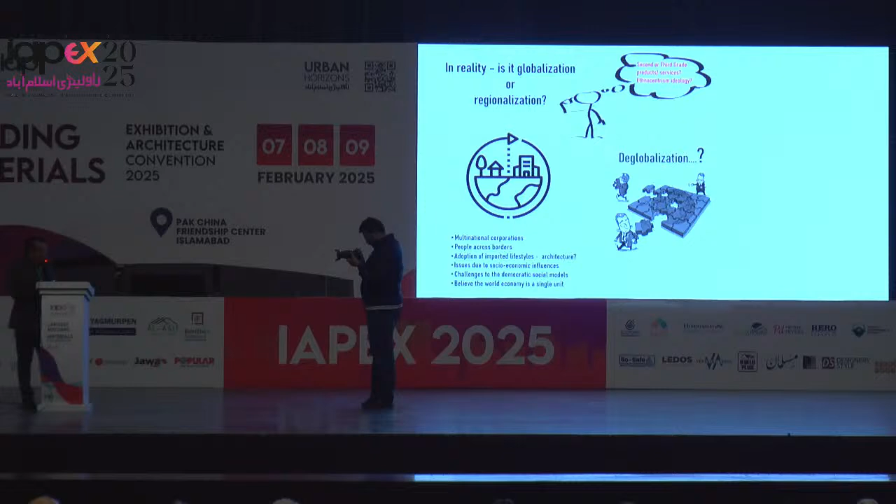With urbanization, we know that globalization also happened in parallel. With that, we have borderless communities, high adoption of lifestyles including architecture, and also certain problems being created. But my biggest worry is whether we are going for globalization or a kind of regionalization. Because in the third-order cities or countries, perhaps we are not getting the same service, same commodities, same goods as the first-order countries. So now we are talking about deglobalization as well, because with the current power struggles and so on, we are having a lot of uncertainties.

So this localization is something we should think about. Of course, this was spoken about by previous speakers as well yesterday, to a certain extent. How do we deal with that, through our services as architects, urban designers, planners? Are we thinking of tailoring what we got influenced by through globalization into our contextualization? Do we foster our identities, our culture, our transformation? Is it guided?

So these are some examples. For example, now an abstract situation has been created, right? This abstract situation has resulted in these kinds of conflicted spaces, as you might call it. I can take some examples from Colombo - perhaps you're all aware of this - but so much of the culture areas have been transformed into nowhere, nobody-known, senseless places. One example is the Slave Island community area with modern architecture, but there's nothing to say, no relationship to the people.

So I thought these are the key things. There may be some more you can add, but at least if we can think of these elements, which we can put into our practice.

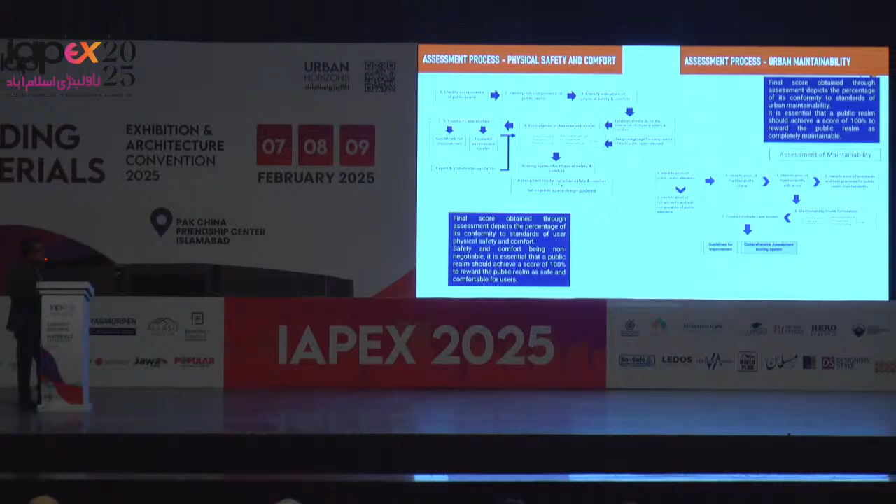I think the psychological part is not really embedded into this, because we thought this would be quite special doing it by ourselves. So different kinds of formulas and methodologies were worked out. Our task was to come up with a statistical model which can be quantified, especially for some of these psychological things, which are difficult. But I think we did it quite well.

So these are the models of how we did it. This is the methodology that we worked out through the entire process.

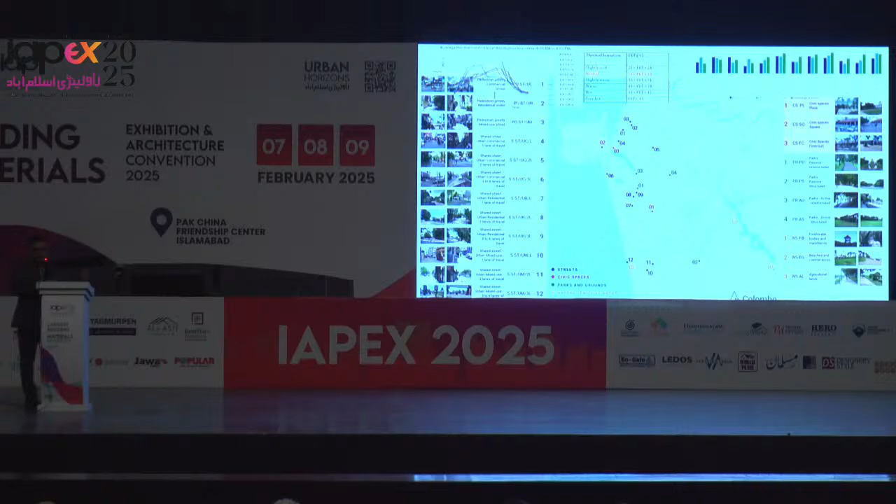I'll go to the next section. So these are the application locations in Colombo. We selected 22 case study locations, applied the model we created, and got the results. These were verified through public testing and so on. Finally we published 3 documents where someone can test the safety and comfort aspects of a public location.

So these are the design solutions I'm going to present. Due to the time, I might go very fast. The first 3 are basically related to urban design, and the other 3 are mostly suburban design, not really central to the city. So out of these, starting here, the Borella Township Redevelopment Program.

We were assigned by the Urban Development Authority to work on this project. This project is a proposal only so far, because these are somewhat challenging in our context to deal with.

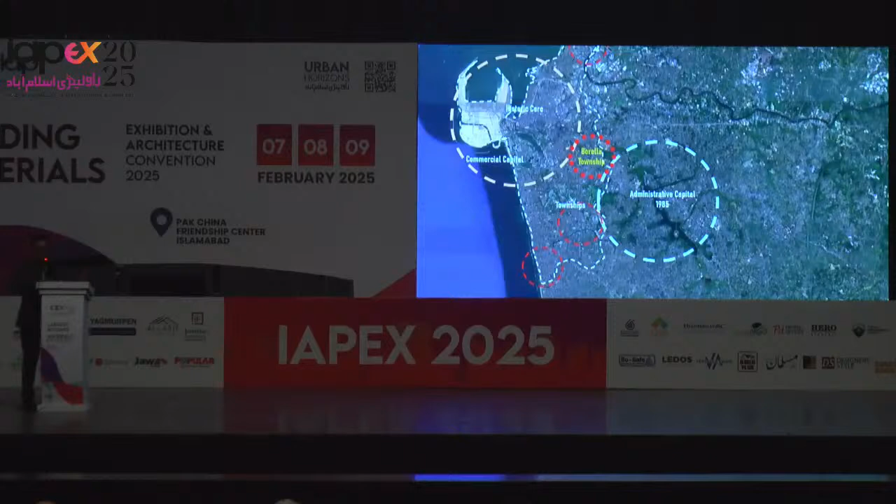As you see here, Colombo is in two distinct parts. One is a commercial capital, the other is an administrative capital that was set up in 1985. Borella township is located in between, so the problems and opportunities are extremely different to other suburban locations, though it's all within the city. Also, a light railway transit intersection is proposed for this location.

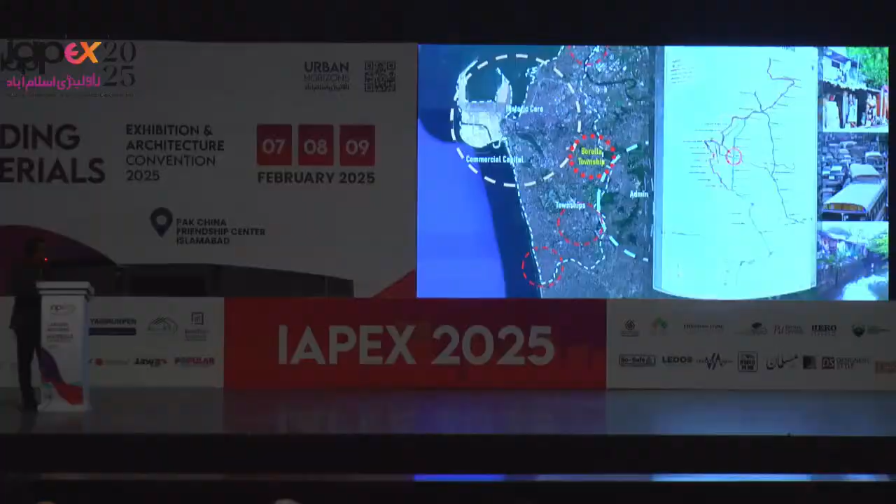So the area was completely lacking in culture, as some of you have experienced. There's no center activity and a lot of traffic issues. There were poor settlements where people were living, occupying a lot of land, and much of such problems were looked at.

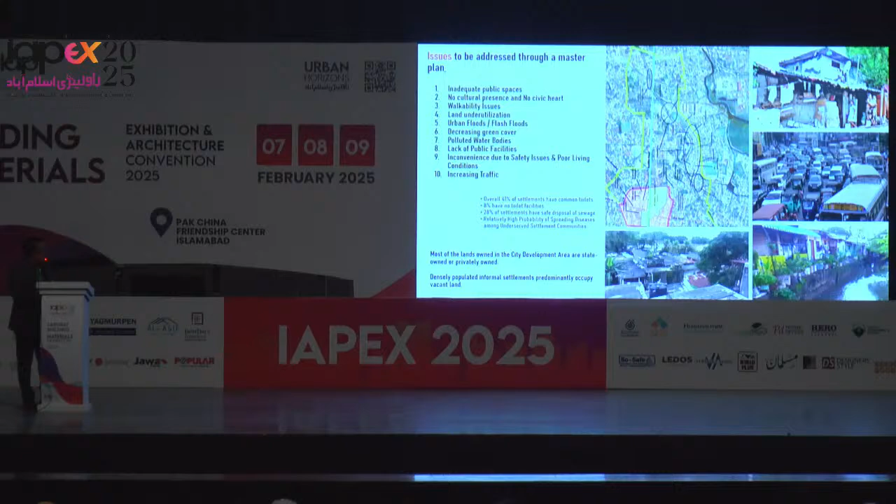So we were thinking to come up with urban design principles, basically a vibrant and diverse kind of upscale integrating community and township. We wanted to introduce new green into the place, and the entire place is to be built with culture as a civic place, right now it's not so. So a mix of land uses, pedestrian connectivity, and local businesses are also here to be played as a main actor.

So simply, if I show you our proposal, these purple and green lines are the proposed LRT railway lines, and Borella is right at the center. In the plan we considered about 3 nodes, mostly supported by other transport as well. This pink or purple colored thing is the cultural spine which we created between these centers, so these lands are to be released. Mostly these lands are from the government, so it's a reorganization and reworking of government lands which are heavily underutilized.

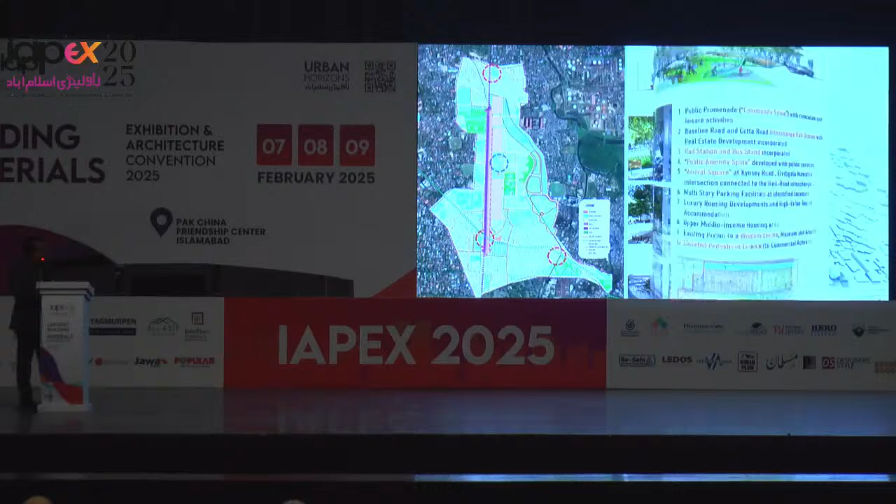So this is basically the visual aspect. We have videos as well, but I don't think we can play them. So that's about this project.

So the next project is about transportation architecture. I'm very happy that, being an architect, I got to work on such a national project, as the architect of the toll gate designs and ancillary facility buildings in Sri Lanka, which is the first highway or expressway built here. We had to work with other professionals, engineers, transport engineers, etc.

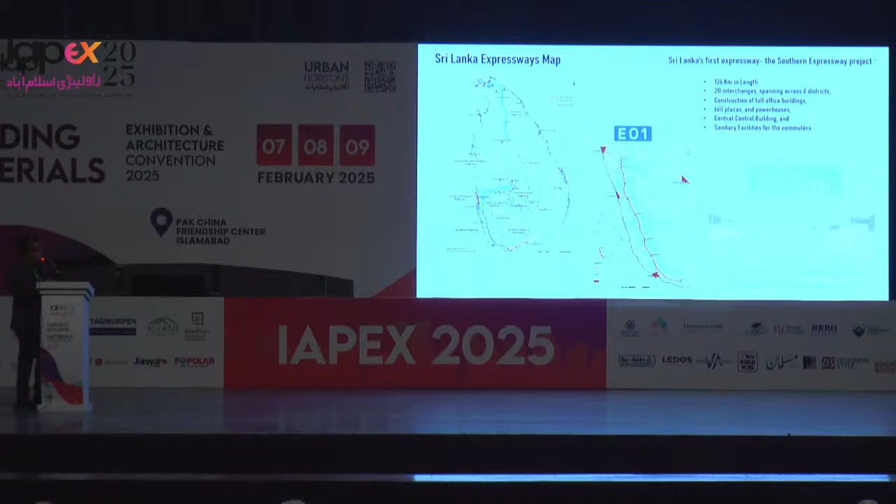When we got this project, I was also looking at how other countries have done toll gates, because this was very new to us, we had never experienced toll booths or toll gates or highways at that time. Then I thought, no, we should come up with a localized solution.

So these are the gates or kind of structures that you can see in Sri Lanka. Perhaps some of you have seen them. Some are temple related, some are social related, entry gates and so on.

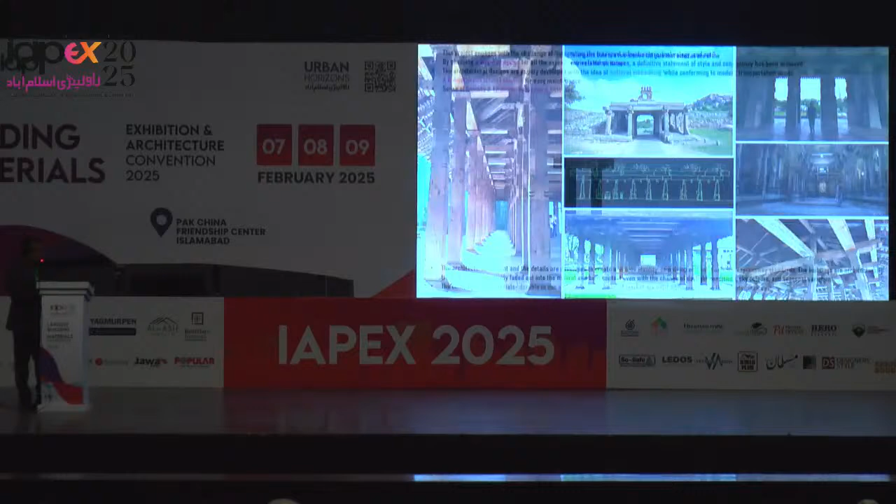So finally we thought that we will get something of a singular, simple design that is from the original local conditions, and that can be added into any numbers without losing the character, the aesthetics and balance. So this is the one that finally we got, but this is one of the things.

What is interesting again is that it has a lot of cultural embedding. So these structures are scale-wise different, but they are more aware of the people. And then it's a gateway.

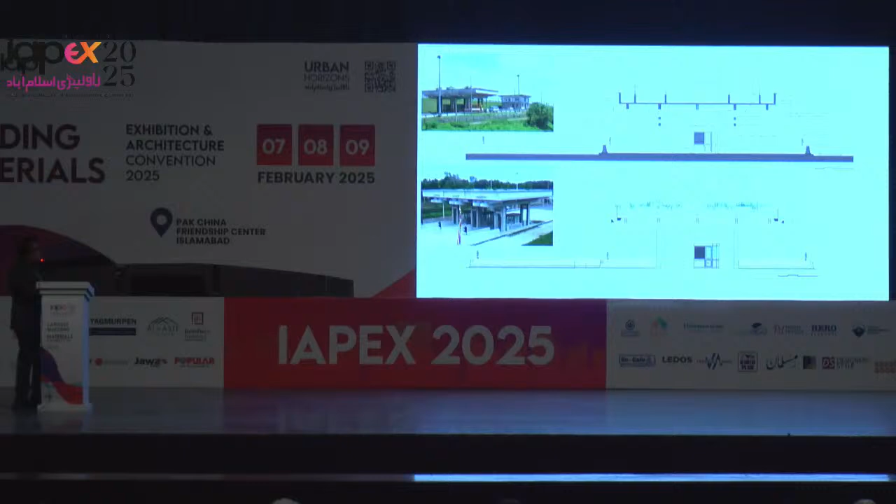So these are the sections, and some of this stuff. You see the locations are quite different. We had to work out differently for each interchange. This is the one in Kottawa. It's all with fair-face concrete.

Again, one of the biggest projects that we did with fair-face concrete in a little bit of an intricate way, with columns and beams intersecting each other at different levels, as you see here. And there's no maintenance needed. That's one of the major features here, that just washing is required, and it merges with the weather and the kind of environment.

So this was also shortlisted for the Geoffrey Bawa Award, as well as we won another award from SLIA.

Right, so the next project is about, again, urban design. This was advertised by the newspapers by the University of Sri Jayawardenepura, looking for urban designers to work with them. And I'm happy that we could do this thing. Sorry, it's going very fast here.

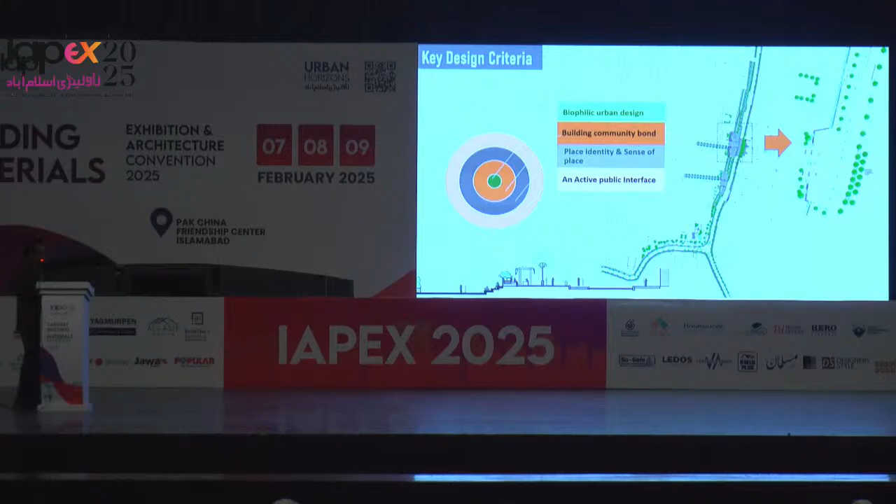Right, so this was the situation before, but I think there's a little issue with this thing. Anyway, so let it go. So this is how the concept is realized.

So what we want to do is to create an interface between the community and also the students of the university, where they can meet each other. So this area has been created by shifting the university's boundary into the university side, leaving more space to the roadside. I think that was one of the greatest decisions that the university took at that time with our recommendations, making a place about 1 kilometer long at the front of the university.

Students can have their meetings, their dances, their protesting activities, and whatever. You see that people are selling and coming here. So it's a very multicultural and multi-activity place.

So this is, again, the practice-based research that we had, I had another student to work on this. And we were looking at other universities to see how biophilic design has affected things as a culture-based design strategy. And then we got good results.

So the next project here is a visitor center in Jaffna. Jaffna is located in north of Sri Lanka, which has a different culture. You can see the existing buildings and so on.

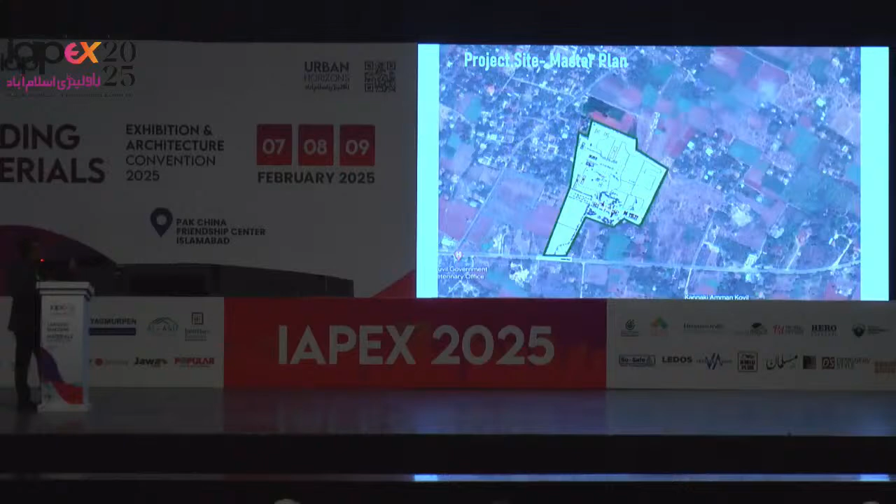So this is the land before we interfered. And this is barren land, there's nothing much. It's a very dry looking area with no trees, not farmed. So this is a proposal that we brought, with one multi-activity building and a series of other buildings.

What's special here is that we created this building project with the participation of the local people as well, because in Jaffna you don't get contractors like in Colombo and so on. So we had to look at their work, and I used to stay there, working with them to a certain extent.

You can see even certain design decisions that we took. So the entryway is located in the pink color, and you don't see the building until you come close to it. So it has been purposely done in that way. This is something that we thought would culturally bring certain elements into there, and also the production process here. I think that's also interesting, and I enjoyed it quite a lot there.

These are the different typologies. This is a multi-purpose hall. Right now you can see that a lot of activities are happening, even weddings, and tourists are coming, classes, meetings, discussions, evenings full of people here, as you see.

So I would say that this is also a socially very motivated project, where Jaffna, after the conflicting time, didn't have much space, because what is going on there is completely different. As I said, under globalization, culture is not really preserved.

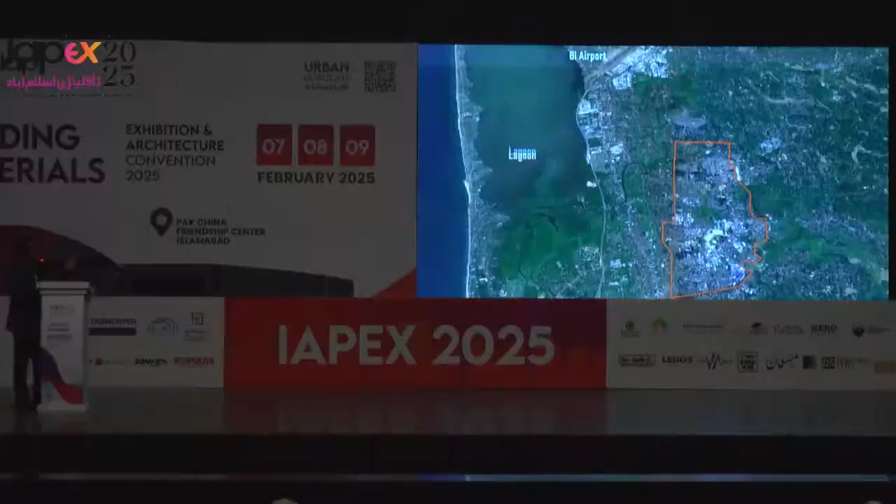I had about 3 weeks to do the designs. This is located in the industrial area established in 1962, near the airport. You can see Bandaranaike Airport there. Our surroundings were quite interesting, the lagoon and Muthurajawela.

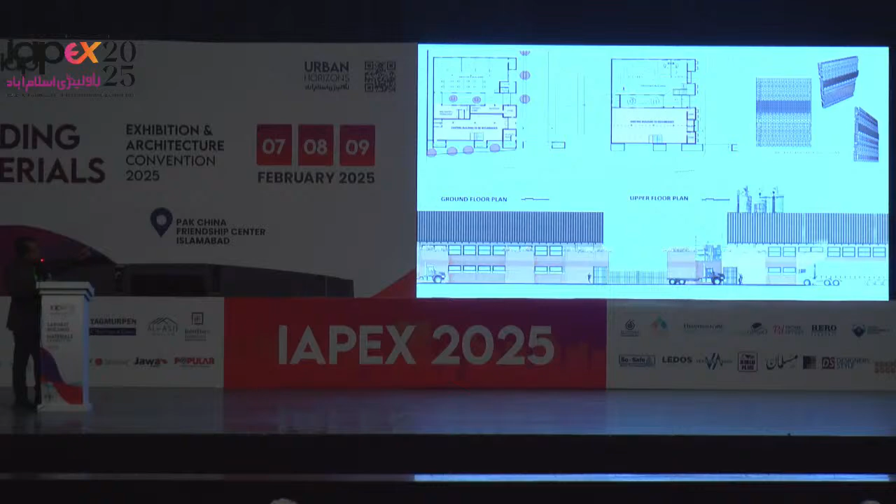This is the situation before we started, and the site is there, a very small site. What we did simply is repeat the existing building, keeping a courtyard in the middle, and brought in some local type materials. So this is the result, before and after.

There are no walls or anything, just open to the street, but in Sri Lanka it's sometimes very difficult to achieve these kinds of things. Everybody would like to have their own gates and walls. But I think we've done something, with the time as well as the cost, very minimum cost.

The last project is something different. Normally as architects we present finished products, what is completed, but I thought it's also interesting to share what is going on now. So this is still an ongoing project.

This is the nature retreat. The site is extremely beautiful, located near Ratnapura, another town where you get flooding always. This site also has flooding issues, but it's in a very hilly area, with the middle part being a ridge.

The site slopes down towards the edges, and then you get the paddy fields. The entryway is somewhat suburban or rural looking. The surroundings, you can see in the pictures, these are the views from the side. This is the central part of Sri Lanka.

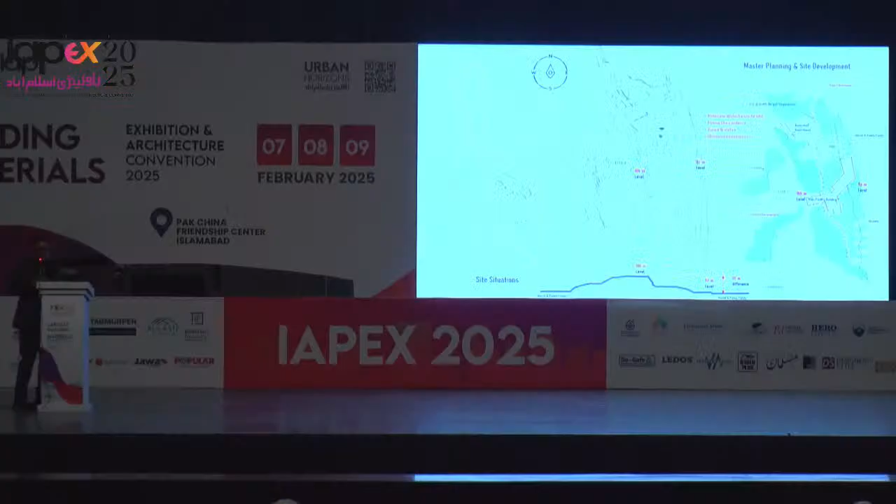In the master planning site development, the main building is located in the middle, and then you have other components, with chalets located towards the nature areas along the paddy fields at different levels. From the main building, you can experience the entire place from different view angles.

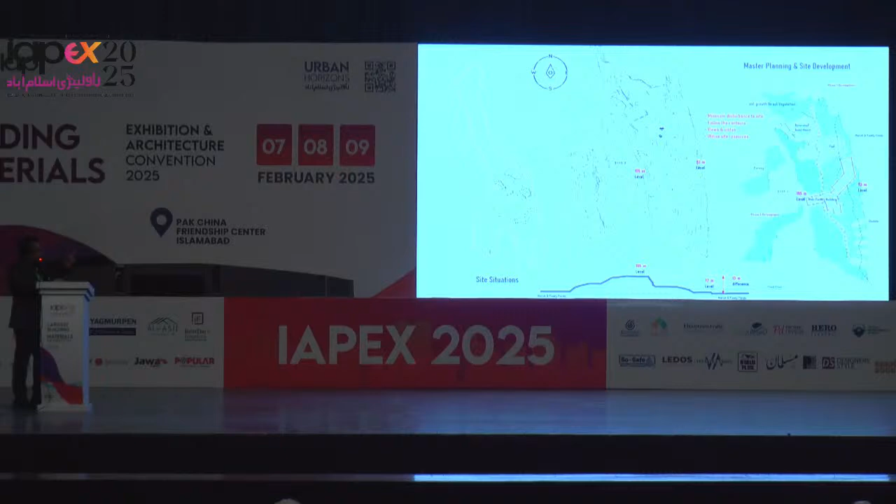The reason for this orientation is we wanted to minimize disturbance to the trees. I think we've taken out only about 5 trees maximum, because the entire site is full of trees. So minimum disturbance to the site, following the contours, views and vistas, utilizing the site resources — these are the key things we adopted here.

Sections were worked out this way, three-dimensionally as well. I have a lot of drawings, but I don't think I need to share them all here. So here are some details of the entrance area.

You can see that the road is at the middle, the higher ground. So you enter there, and then you have a series of levels going downwards, because we have a 13-meter difference. This is how we started constructing the pool and the building using concrete, because of the water table — it's an effective flood plain.

The site manager is a local man. This is the entire site with so much green. It's still going on, some of the works here, that's why you don't see the finished product yet.

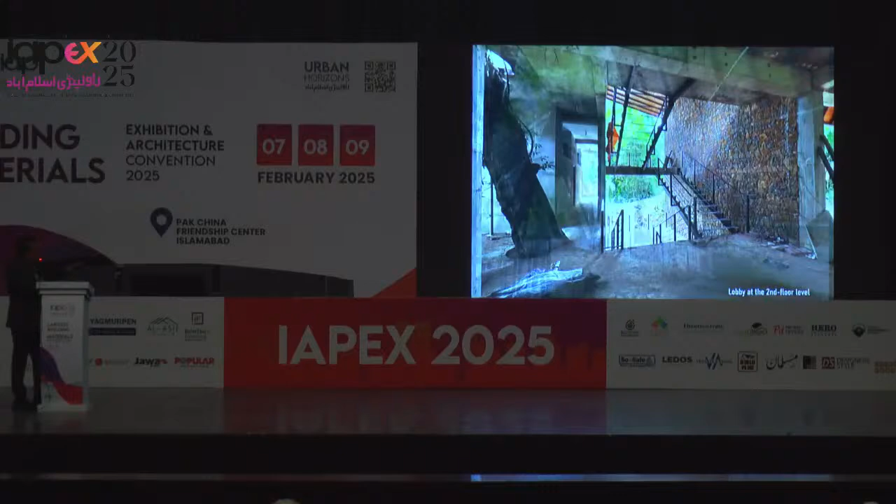The bottom is kept open. We use a lot of rocks and small elements from the site, even timber is available around this area. This is the main entrance area. We used to carve the spaces out from nature. So this, again, is the entrance area.

That's about all I can share with you in about 15-20 minutes. I think I was on time. Once again, thank you very much for listening. Thank you.

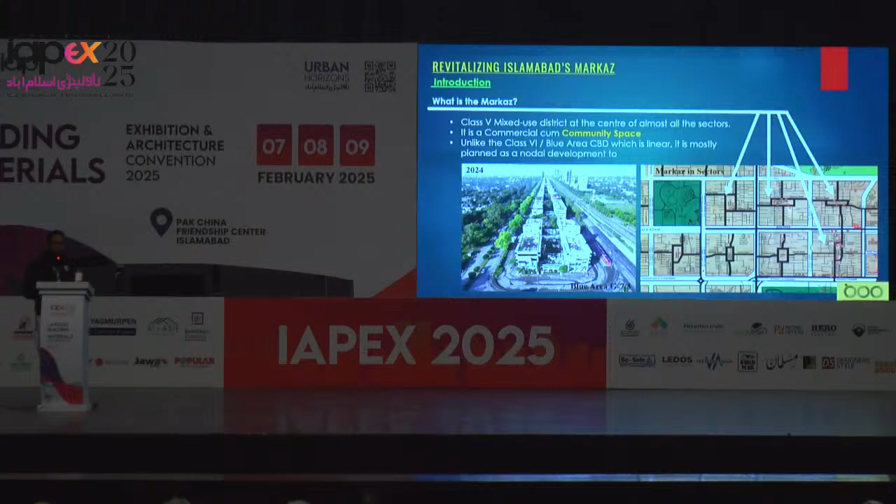So for those of you who are not from Islamabad, just to give you an introduction: the planning done by Doxiadis is divided into sectors, and each sector is considered a class 5 community, meaning a set number of people or inhabitants that will live in a particular sector. Each sector has 4 parts, with one central part considered as a Markaz. On the left-hand side is the class 6 category community space, also known as the Dynapolis, the linear expanding CBD.

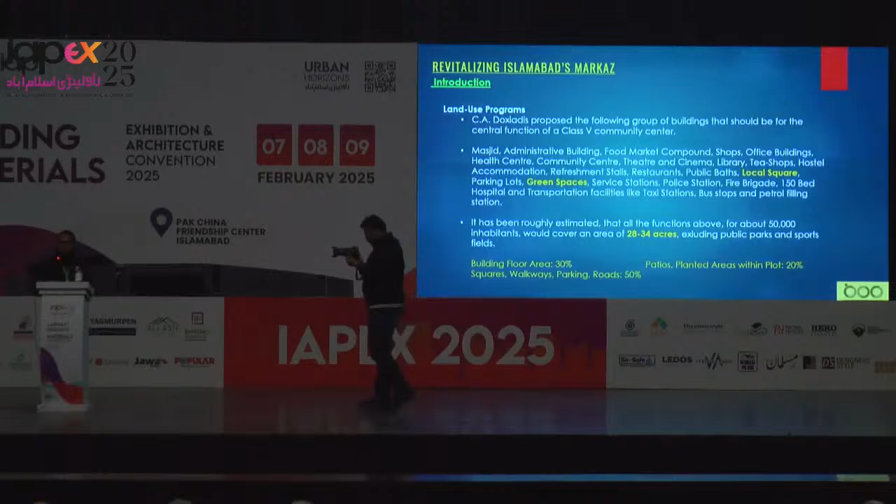So there were a set of programs introduced in the Markaz, which I'm going to talk about in particular. By definition, the Markaz is not only a commercial space, but it was designed for commercial and community activity. But the latter part is not so much promoted in our case, and the land use has been changed multiple times.

Considering these are some of the key programs provided in Doxiadis' documents, which you can also visit at the CDA's library—there are pages of like 8,000 plus documents available—the key word I've highlighted is the local and the green spaces. Out of the area proposed, a standard 28 to 34 acres of land is designated for this Markaz, which would consider about 30% as a built-up area, and the rest goes to open spaces around the building, places like walkways and parking road areas that are under CDA's direct involvement.

So talking about the first Markaz here, this is the G6 Markaz. As per the definition, most of us just consider that the Markaz is actually in the center, which is the case here too. But since this was the first Markaz in Islamabad, there's a slight difference in the layout design. You see there are two precincts in this.

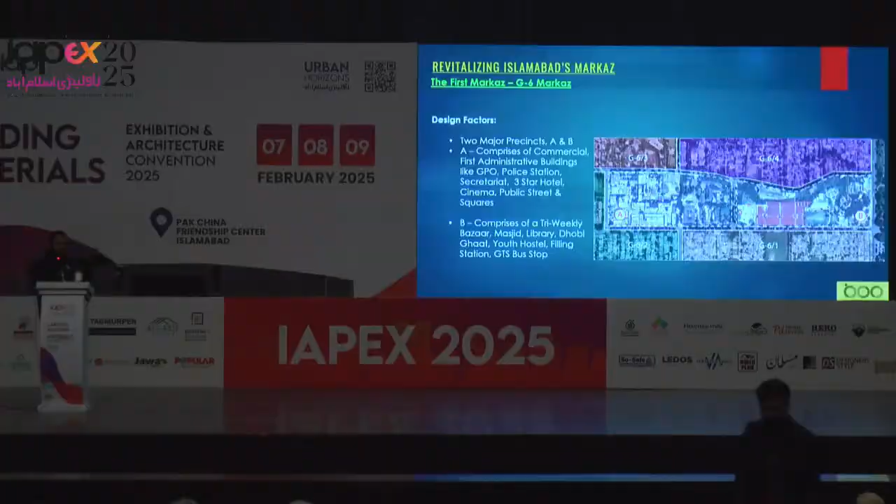The left part caters to all the commercial spaces, and since Islamabad was designed for a new set of inhabitants settling in, they required some extra amenities and services. So this precinct on the left side consists of a police station, a GPO, and the first administrative secretariat building. On the right side, we see a tri-weekly bazaar, which was the first basic need of the customers, a Jamia Masjid commonly known as the Lal Masjid, and then we have the Dhobi Ghat at that time—there was service of that. Youth hostels, male and female, are also over here. So as per the layout, whatever the city actually required in order to grow, all these facilities were very organizedly planned.

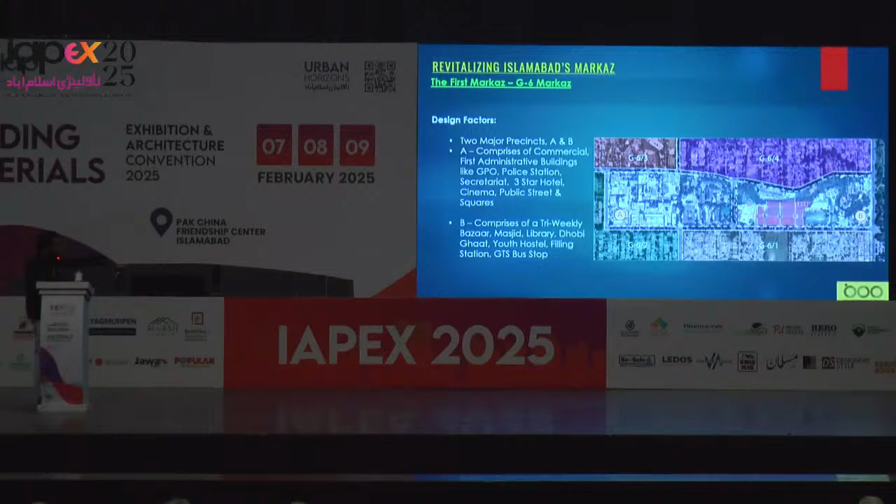Whatever was designed by Doxiadis was very thoughtfully thought out, and it was made very accessible and permeable to the people.

So considering, dissecting the first precinct over here, on the left side the pink line actually defines the pedestrian core. And in the guidelines, if you read Doxiadis, he actually says that in order to retain those people, you need to protect your pedestrian cores from the vehicular movement and the traffic noise.

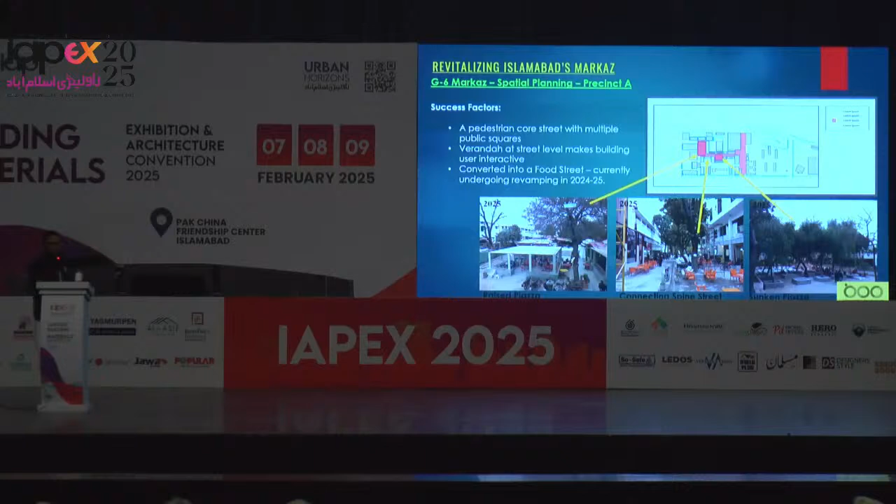So this is the current renovation that is going on. After 65 years, the city still requires an urban renewal method, and it is undergoing this renovation right now. So what we are seeing over here is the difference in the public square and how he actually considered the importance of public squares in order to create a micro environment.

So now going to the second example, the G-7 Markaz.

Doxiadis in his planning always respected the natural landscape of Islamabad. So you can see there's a stream that is flowing and dividing the Markaz into two parts. It could have been spatially displaced on one side, but it is still kept very centric so that it has easy accessibility from every side.

But over time, since it was not administered properly, this led to a few problems which we are going to talk about. So now, on a smaller scale, but on a standard size of 30 acres, the Markaz has all the amenities that were designated.

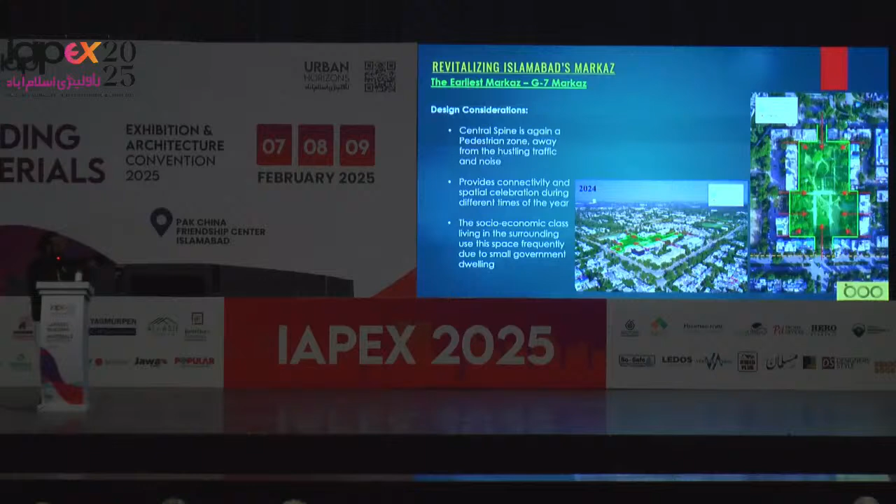So now taking an aerial shot of this, we are considering how the public space that was originally designed looked like, and over the period of 65 years, how this place has been formally and informally transformed.

And again, we would see a continuity and all the good urban features that could incorporate a public space, how there is visibility from all the buildings into the public square, and accessibility from all the people living in the socio-economic class around here.

So through these urban maps, we actually see that since most of the land was not properly taken care of by the CDA, along the riverine flowing right from the middle, we see a growth of trees over the next 40 years onwards.

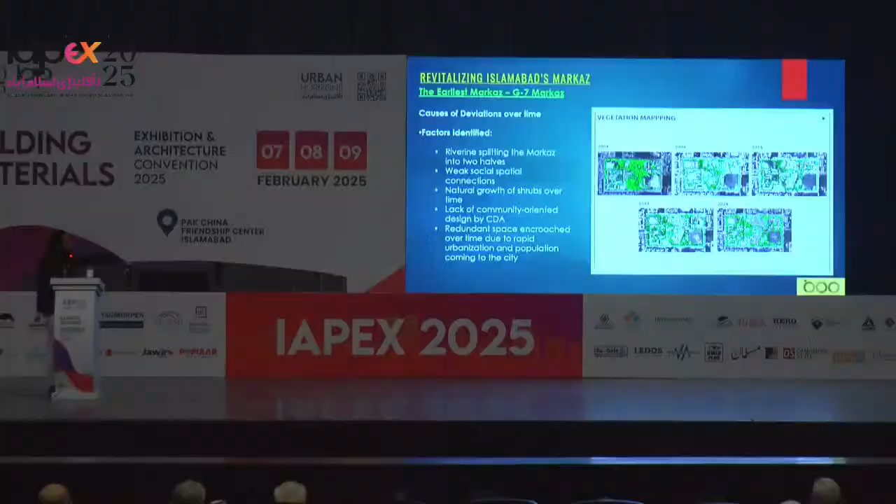But from 2004 onwards, we see that since there was a population influx coming into the city, and most of the people living over here in this sector are from grade 1 to 5 to 17 almost, there was a lot of movement and involvement of people coming for job opportunities over here. And we see that the redundant area is now being transformed into a slum area.

So underutilized space, again, the issue led to this.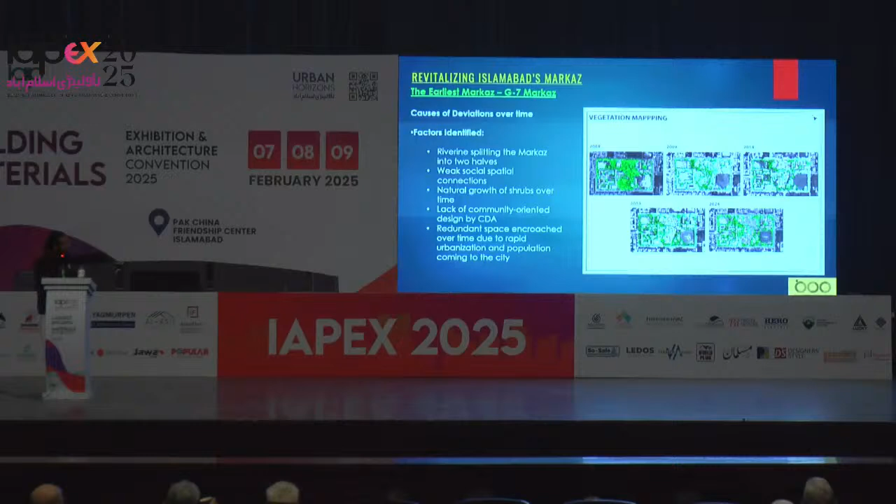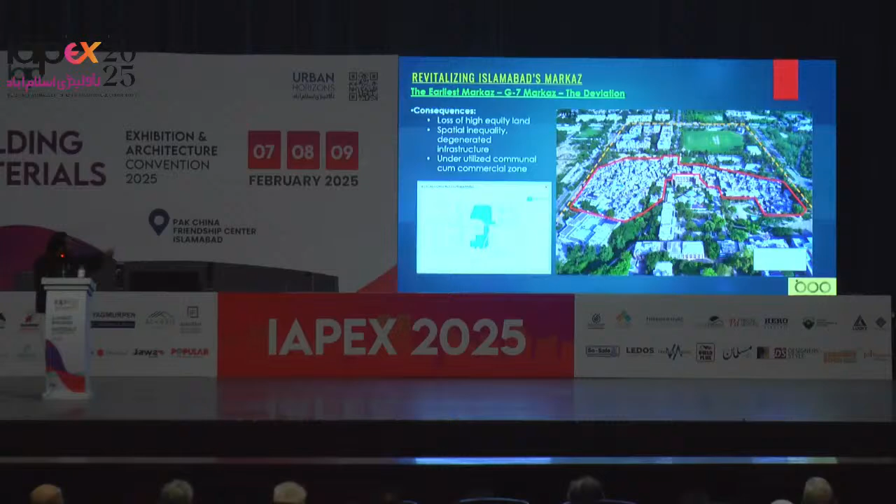The blue area actually highlights the zone that has been mapped over here. Okay, so taking case studies of two more of the Markazes around here.

So for those of you who didn't know, Doxiadis actually planned a railway station in I-8 Markaz, but in later regimes it was changed, reverted back to a Markaz. Now we see that this design has not been done by Doxiadis, but by some local urban planners, and the consideration for public space has been significantly reduced.

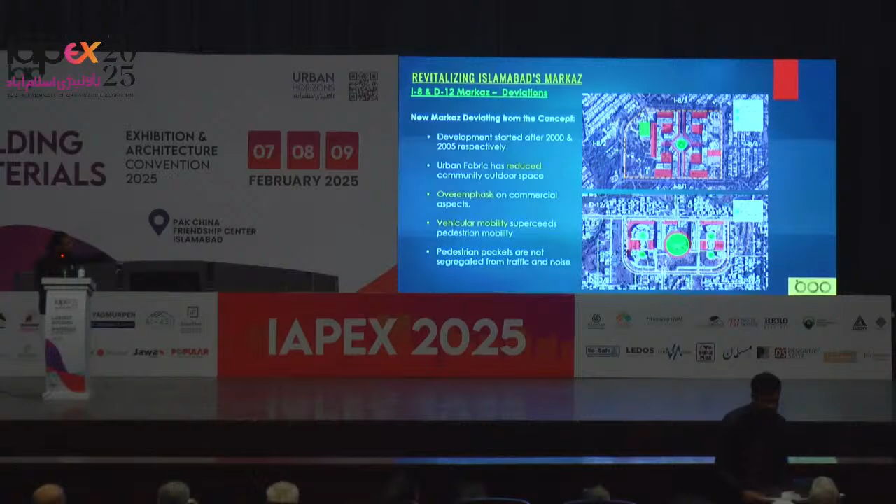Similarly, if we see the development of sector D12, the master plan has been locally done, and what kind of urban space has been strategically placed. So the volume has reduced, the vehicular mobility has increased many folds, and what is affecting is that the public space has been compromised many folds in this case.

So now I would take a case study. This was part of my thesis that I gave back in 2009, and I did the research studies in G-9.

This Markaz was originally designed by Doxiadis, and there are still plans over here, but over time there were some deviations done in the master planning.

At that time we didn't have these 2-3 major buildings where we now have the Tehzeeb and the Awami Trade Center next to the public stations. So we see a street that has been designated deliberately because we have a culture of bazaars and informal activity space.

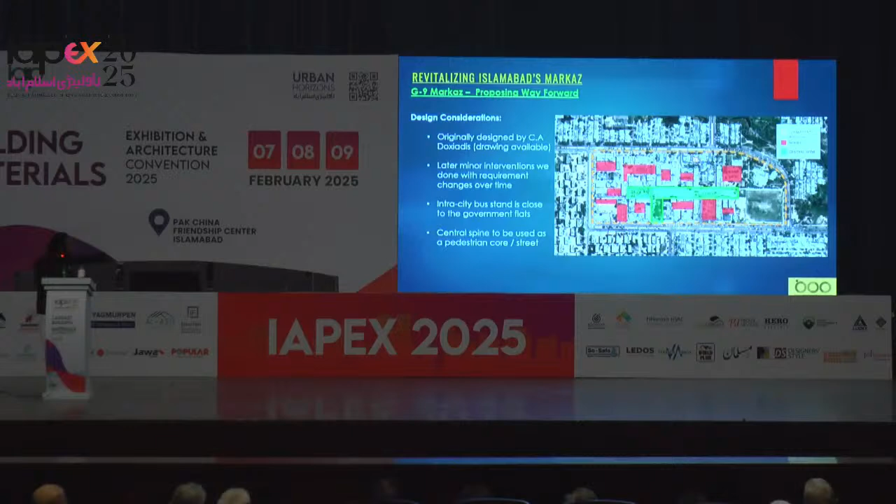Some of the micro level analysis that we did, we actually looked at the plans proposed back in the 1960s and did research in 2008 on what were the deviations in land use. We saw a major compromise on the public buildings placed in the Markaz. Let's suppose a plot was designated for a gym or sports area, but was now being commercialized. So in order to reclaim that image, we had to identify the problem in the master plan and how we could strategically place those public buildings to revive the concept of a Markaz.

After doing the analysis, I proposed urban plans showing what strategic interventions could be done in what parts of the area. The lower map in the green left corner depicts where I first proposed underground parking plazas, wherever it was strategically required. Later on, from 2013 onward, we saw in F7 Markaz that parking plazas were horribly designed, so we need to make sure how we are making these kinds of interventions.

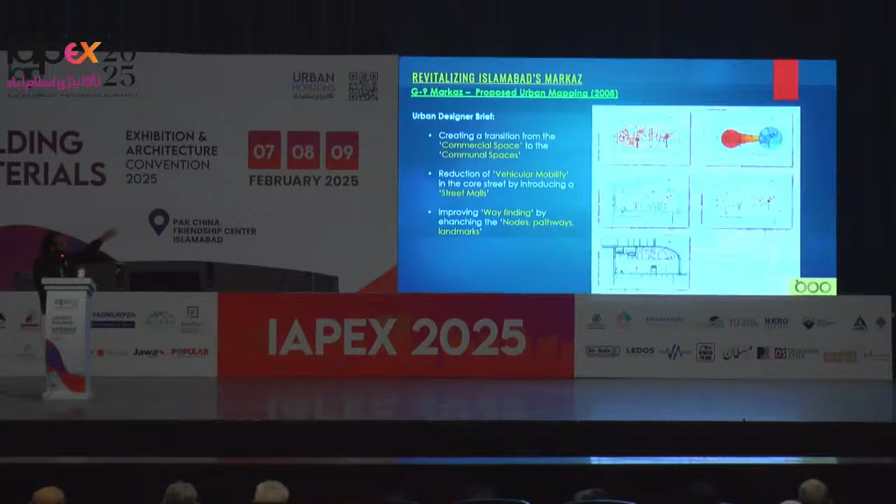So we see a transition, and now the central core has been protected. We can see the vehicular movement is again being restricted to ensure that the public space in the center has been revived. Red highlights the core that is very commercial, transitioning to a space that is very public and communal.

So this was the strategic master plan that I proposed. Over time, there has been a land use change in this, and initially the footprints given out were very small. Now we have requirements for large retail areas, so I proposed bigger footprints by combining 3-4 buildings that were demolished.

This is the first time that an urban landscape intervention is being proposed into the Markaz, where we can restore a public realm. So from the very busy commercial space on the left side, we make a transition by using it as an informal or formal bazaar, keeping the activities around the clock.

Also, I would like to mention that G9 Markaz is one of the busiest Markazes, equal to or even more than F7 Markaz. So the community coming here is not only from the sector close to it, but from other parts of the city, because there are two bus terminals, intra-city and another one.

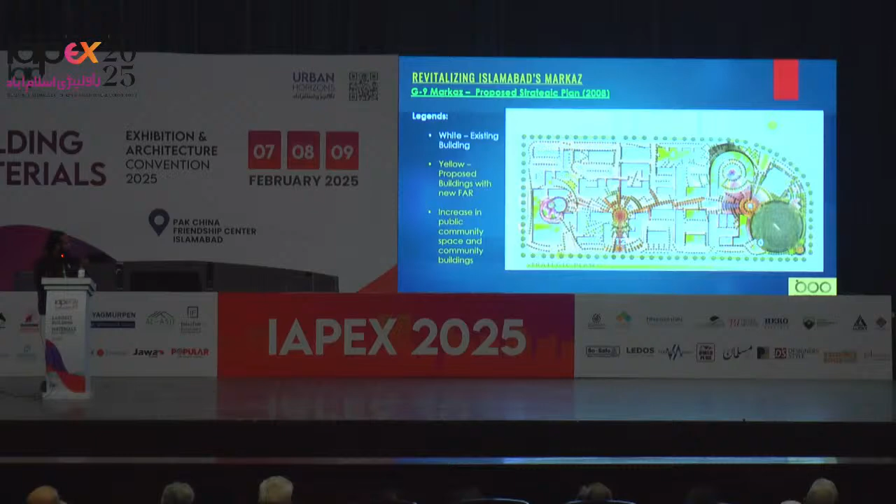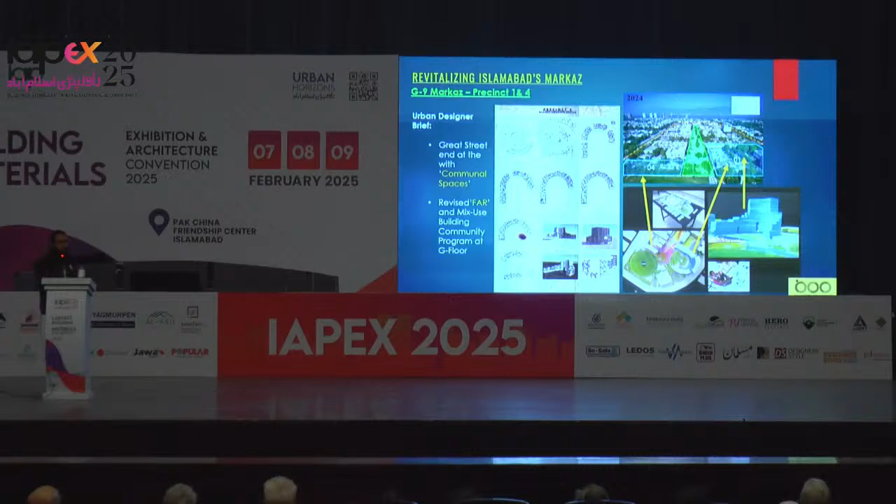Some of the aerial shots show where I proposed high density in order to retain public space and use it effectively. I proposed high density apartments, which we later saw in F10 Markaz and other Markazes, where they are now introducing high density to make commercial activities more viable. It also increases the land value.

We see how the shape of the landscape is changing, the hard rigid grid now being diluted with landscape formation. We are adding water bodies, and you can see the vistas through this. Only 3 buildings were proposed to be demolished, which were extremely ugly, and they were also becoming a barrier into the main core street.

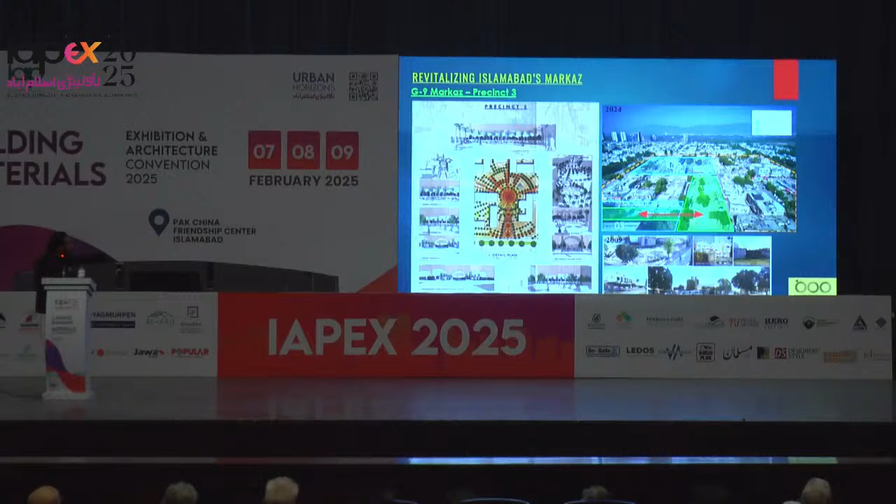So the whole idea was that in order to develop a national level public space - this is the last one - just to have an idea, we don't have public spaces that could be of any international level, so we need to intervene. We not only need to focus on architecture, but on the places and the public realm outside it. So these are some of the examples.

So why are we going abroad to visit these kinds of public spaces? We can have these because we potentially have places originally designed by Doxiadis and other planners.

I would like to thank all the students who have come to internship at my office and worked on the urban mapping. There's a lot of urban mapping. Yesterday we were discussing that these mappings should be done because over a time span of 60 years, there's a gradual change in the urban design, the buildings, and the landscape. So how we can document and preserve it for the next generation is through these techniques. Thank you very much.

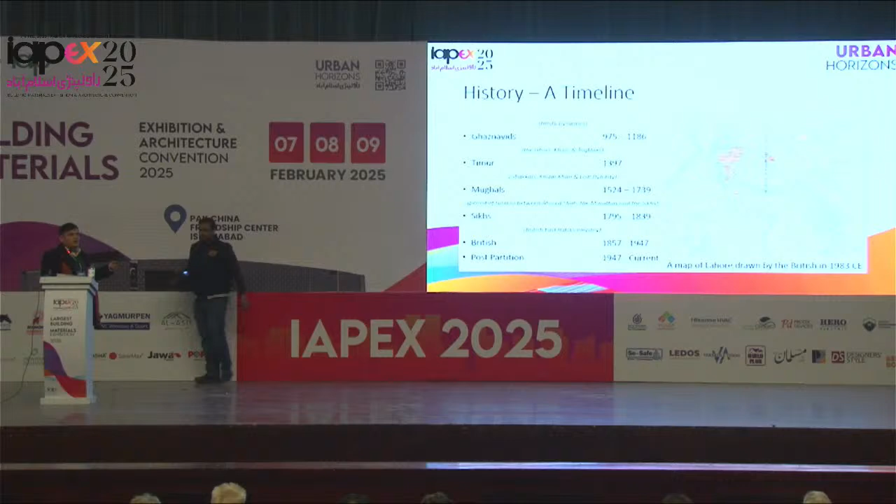So just quickly going through the timeline of Lahore, we will see that Lahore has gone through multiple ups and downs. Initially, Lahore was ruled by Hindu dynasties, but it actually came into quite importance and started to get mentioned in different accounts during the period of Mahmud of Ghazni. This is the time when the re-establishment of the formal area of Lahore fort is actually made. During the time of the Ghaznavids, Lahore was facing quite a prosperous time, after which it had its downfall. We see the period of Timur, the barbarian, where the city was almost eradicated.

Again, it was a time of quite turmoil till the Mughals actually came into being. We see that the interest of the Mughals was quite a lot over here, and evidence of that is present with all the architecture, art, and culture that is currently present, which we actually image Lahore as when we currently see it. Then again, it goes into a downfall during the periods of the Sikhs, and comes back up during the British Empire. It is actually during this time that we see Lahore exponentially grow with the addition of areas such as the cantonment.

Then, when the partition actually happened, Punjab went through a great period of sorrow because the province was divided into two, the western part becoming part of Pakistan and the eastern becoming part of India. And we saw these mass religious migrations take place. Again, this was a downfall period for the city physically, which was then again uplifted once Lahore was made the capital of Punjab.

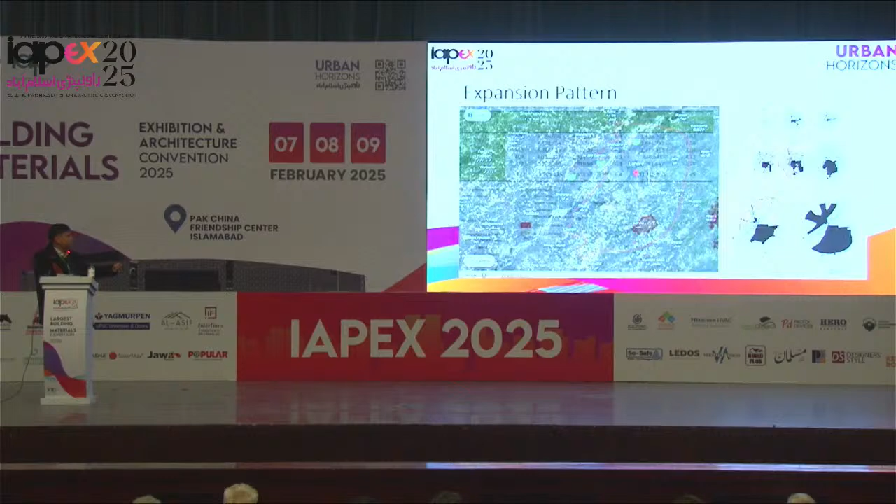Mainly the Lahore city, cantonment, model town, Raiwind, and Shalimar. If you look at the densities of these areas, Lahore city has the highest density, whereas the cantonment has a difference of about 5 times between the densities of these two areas. Right now I'm not taking Raiwind into consideration, because it is still a developing area and is further growing.

So how is the city physically growing? Over here we have a time lapse of satellite imagery of the past 40 years. Just so you have orientation, you have the old city over here, Raiwind down south, Sheikhupura over here, and River Ravi flowing diagonally from the northeast to the southwest. Please observe how the River Ravi is also changing according to time.

If you look at how the city is actually expanding, you'll notice it is expanding more towards the south. It is bordered by River Ravi towards the northwest and northern side, and towards the east we are bordered by India. So a certain barrier has been kept towards the eastern side, and hence most of our growth has been happening towards the south, while the old city, being the central business district, is used as a nucleus.

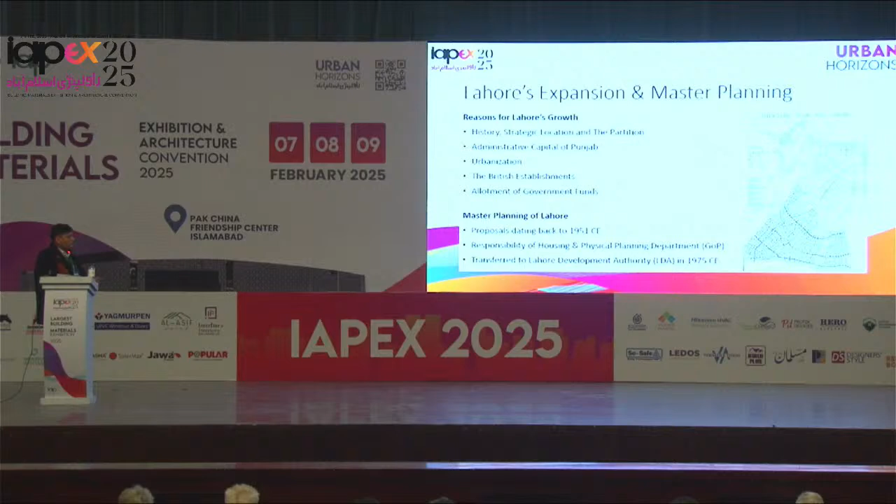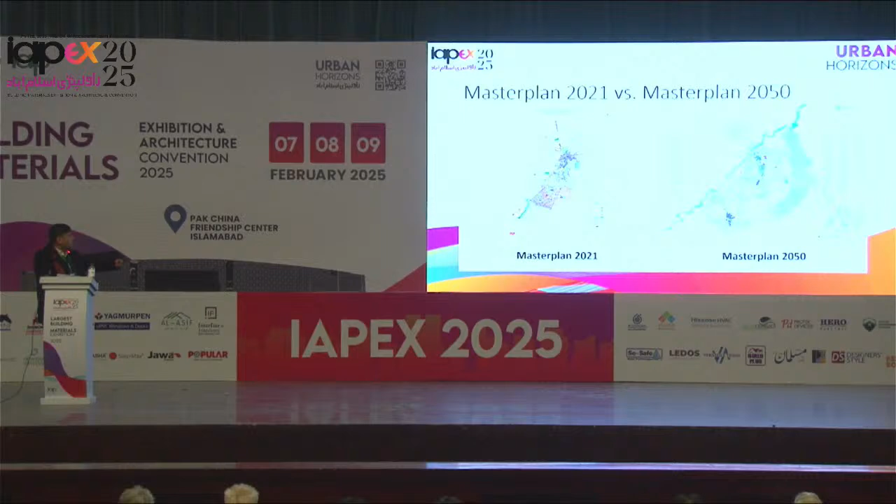We will be focusing on just the last two proposals given, namely the Master Plan of 2021 and the Master Plan 2050, which is now in effect. I want you to compare the two and see the differences between them. Just to have a clear image, we have a zoomed-in version. You can see that the expansion is still being done towards the south.

If you look at the very bottom of both master plans, Raiwind has now completely been incorporated into the urban area of Lahore. But still, in the Master Plan of 2021, all expansion has been restricted between Firozpur Road and the River Ravi, because we need this buffer with India due to our still volatile relations with the nation. There have been instances such as the War of 1965 where this border has been crossed, and we did have a conflict with India in the area of Barki. Luckily they were not able to come into the city, neither was the interest in Lahore. The focus was mostly towards Kashmir.

But now, if you compare this to the Master Plan 2050, there is one major difference you see: the implementation of RUDA. We will be talking about RUDA later on. The projects of RUDA are all along River Ravi, so these large hatched spaces that you see, which are empty right now, represent the entire jurisdiction of RUDA. RUDA is basically the Ravi Urban Development Authority, a new authority that came into existence in 2020. We will look more into that in detail later.

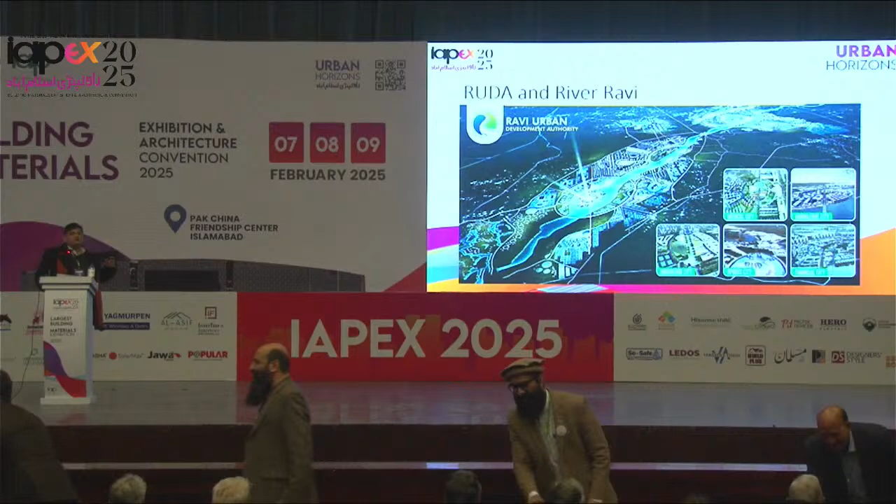We talked about RUDA a little bit when we looked at the master plans, and we saw the issues of Lahore as a metropolitan. We need to talk about RUDA as well, because RUDA is basically an authority that has been created with a project in mind, which is to revitalize River Ravi and to stop the urban sprawl. How do they plan to do this?

With all the research that I have done, it uses extremely generic terms to do this, such as creating botanical gardens or having wildlife reserves or algae ponds, but it does not talk specifically about the ecosystem or the ecology of Ravi itself. Ravi has drastically deteriorated, with its water becoming massively toxic, to the point that even the fish life have almost completely been eradicated. The problem is not to actually develop that area, but rather to rehabilitate it.

If we look at how this project has been advertised, first of all, my apologies for the quality of the images - these are the images I was able to get from their official website. So how are they planning to do this? You only see development being advertised, of a knowledge city being made, or a medical city, or a sports city, but there is no emphasis on basically the ecology.

Unfortunately, I wasn't able to get a master plan either, but these are the ways that they have imagined the place to be. You do not see consideration of the floodplains. We see seasonal flooding happening in Punjab quite regularly now. And how do you expect that these places will actually react when

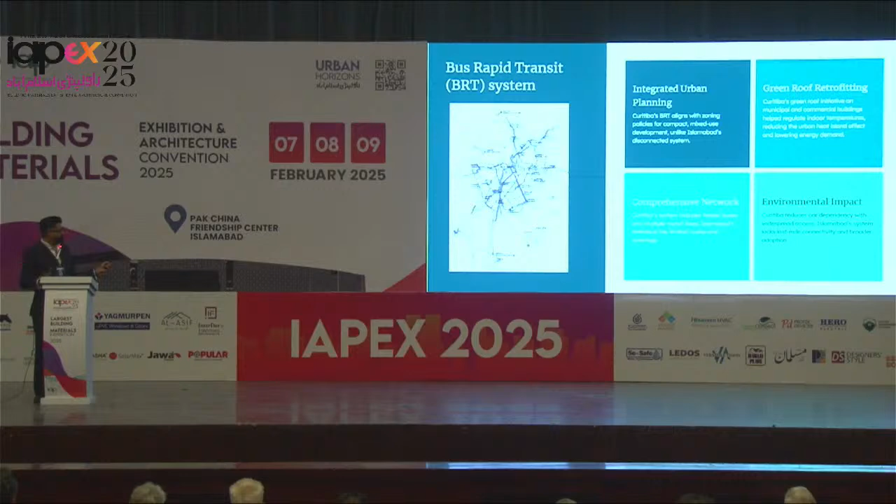So when they were coming up with the BRT project, there were 3 main pillars they were focusing on. First, it should be sustainable - we're kind of familiar with that term, to keep it more environmentally friendly. Secondly, it should be part of the urban fabric, connecting the city rather than just going a road through it, like connecting Rawalpindi and Islamabad.

And thirdly, the entire city was going through some projects because it was being treated holistically, and a lot of the older buildings were inculcated into the project and made part of the city again. Their functionality was increased, their carbon emissions were controlled, and they were repurposed for making Curitiba a more modern and user-centric city.

So when they were making the BRT in Curitiba, the stakeholders came up with a few things. First, the entire lighting of the city was converted into LED, and the conventional lighting was put off so we can save some energy. Secondly, the existing green spaces were not demolished - they were in fact made part of the urban planning.

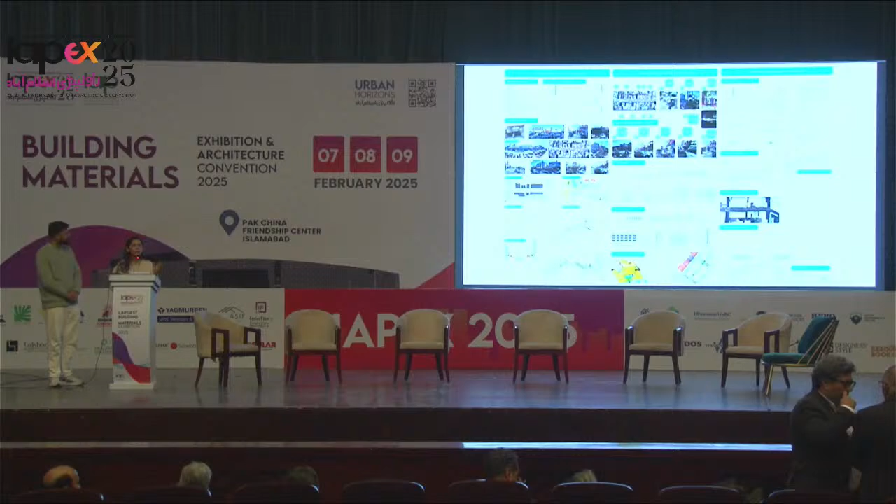Now this was the point where students started coming up with their own initiatives. This is the bazaar, which I'm sure you're all aware of, near Ghakkar Plaza side where Tehzeeb Bakery is. One student started rejuvenating that site and came up with a great master plan which had green spaces, proper pocket areas for people to sit, and the entire environment was completely changed. So the question is, if students can come up with things like these, why can't authorities take them into consideration and make those places better?

We'll quickly go through this. Okay, so this was another case study.

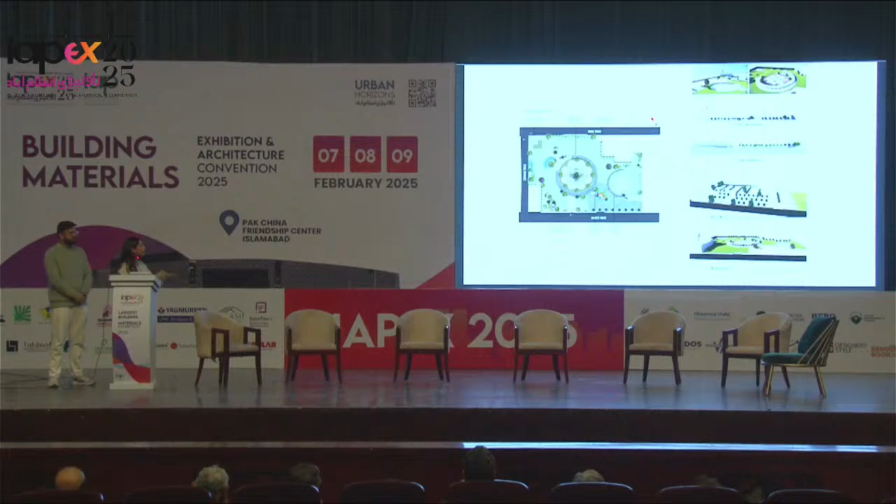Now it's a great initiative, but it has created so much chaos because if you go around in the evening time, you don't even know where to park your car. So this is the parking area that has been allotted there, but a lot of people don't know about it. So she renovated that area, made it a good urban space, and gave it a space for an amphitheater where people can come and sit, making it a happening public space.

Another student worked on this—sorry if the images are smaller, if you can see towards that side—what he did was, at a particular chowk, because of motorcycles and bikes there were a lot of accidents and chaos being created. So he designed a flyover, like a ramp flyover, for the bikes and cycles to go on, while the cars still use the same road.

So I think ideas like these are super great for places to become more habitable for people, and then obviously tactical and creative placemaking makes it more vibrant.

Then another student worked on a park which was currently existing there. Another student came up with a lot of urban regeneration ideas where communities can meet, people can talk, and kids can play. Sorry, we're short on time. So that's it, thank you.

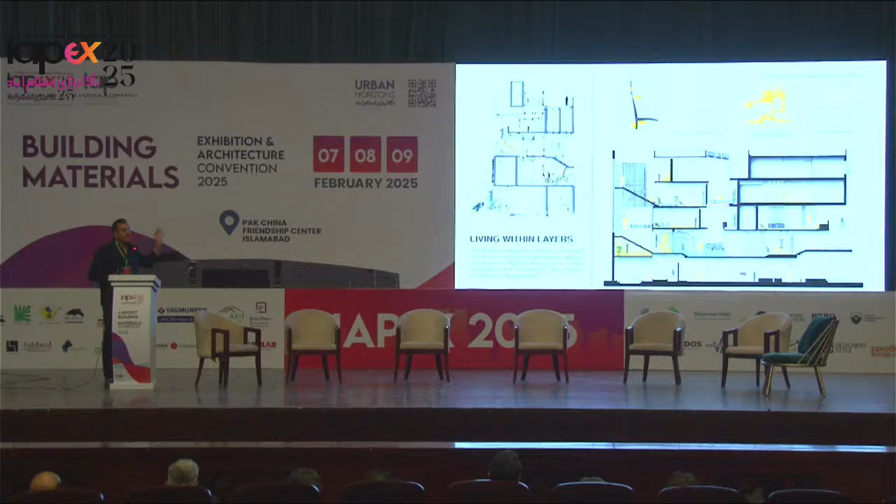The first project I'll be showing you is from Rawalpindi by Sadia. Sadia's project was very interesting because this is predominantly a housing project, and she was focusing a lot on the complex nature of the Pakistani family. In Rawalpindi, you see a lot of joint family systems, a lot of people living under one house. So what happens when you shift those independent family homes from low-rise to mid-rise? And what opportunities does it present to you? So you can see her lovely little details where she's trying to navigate between these complex families and creating architecture that accommodates everybody and also responds to the context around it. Over here, the idea was that the ground floor, because we do have this kind of typology in Rawalpindi already, where the ground floor is generally commercial and above is residential, she's exploring those same ideas by opening up the ground floor, allowing people and the building to open up to the street itself. This was the kind of stuff that she was exploring.

The second project, by Zainab Malik, her project was focused in F10. F10 is that very interesting place in our city, especially the area between F9 Park and the Markaz. Over here, her project was basically focusing on the in-between spaces, in terms of buildings, with the buildings themselves, and also within a building, and how can we exploit that to create more interactive spaces.

So her project, because F10 is now that space where we have the low-rise and the high-rise, her exploration resulted in this. Her focus was to create architecture where the facades would talk, where architecture and livable spaces move from the street and also vertically upwards, so that the facades can talk and there's a strong connection between the building and the street. This is her project.

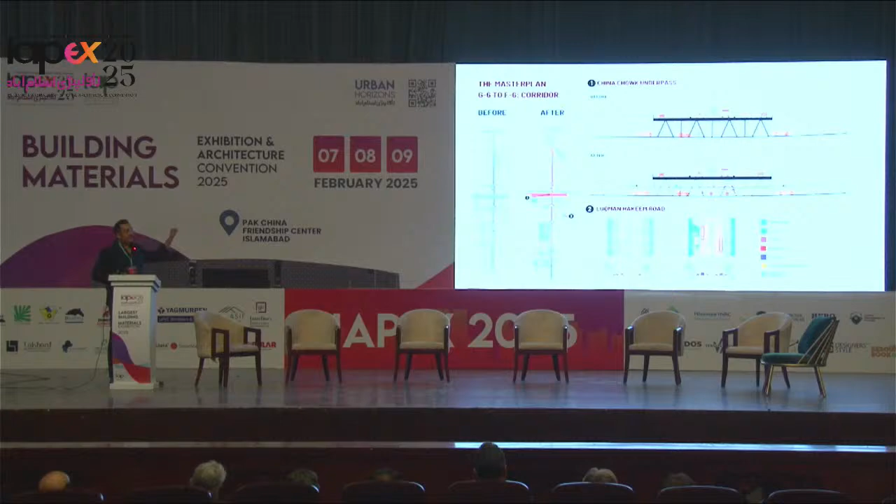Then after that, the students got a chance to pick their own sites, again bringing in all those livable cities concepts in terms of mixed use, mid-rise, mixed income developments. So this is one of the projects.

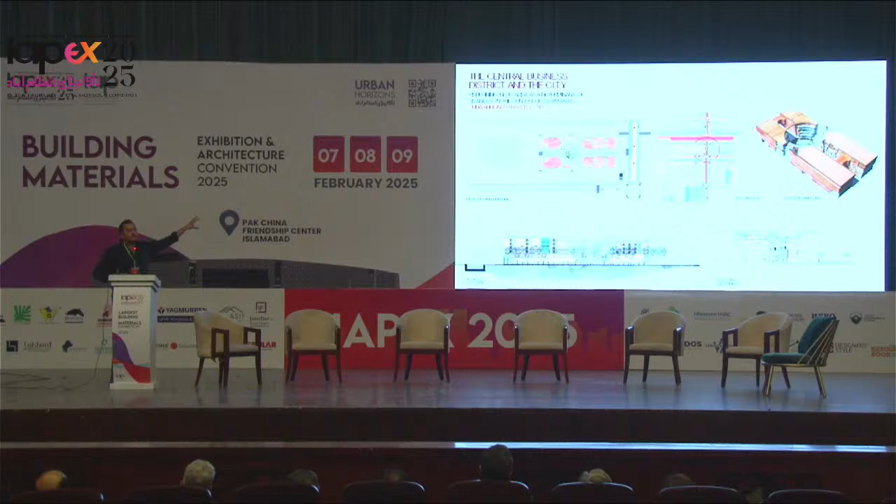Here Dua was kind of paying homage to Anwar Said Saab and his projects. This is on Blue Area. The idea was, that's the main central corridor on the right side, and she wanted to open up her building, make it a node of sorts that attracts people as they're walking by, giving them that connection to architecture, and creating public space that blurs the lines between the road and the building itself.

This is another project by one of our students, Umar. He was focusing on the site at that intersection between F6 Markaz and Farooqiya Market. So the idea was how that...

His project was about totally disrupting the idea of the car itself, and at that point, can we change the environment around that road entirely to promote public space, walkability, and cyclability as well? His project also wanted to really pay homage to the Margalla Hills. So he thought this would be the perfect place from where we can really break this car-centric idea of ours.

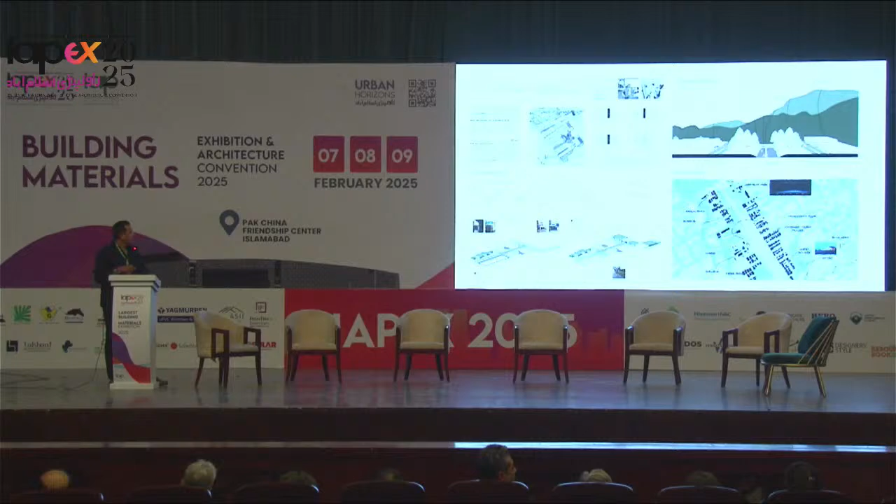This is another project by Mujahid, because he was focusing on the connection between F6 Markaz and F7 Markaz. He chose the 7th Avenue, the bridge that goes between the two sectors, as his site. Interestingly, he wanted to develop a library there because he identified how there were multiple schools, private and public, and thought this may be a very interesting spot to promote public space in terms of children and their usability and presence within the city.

The next project I want to show you guys is Placeness of Space. This is a small project that we did, and again it started with 5 minutes.

On one of our walks in Pindi, we noticed how the water filtration plants were a very strong part of the urban environment in the old neighborhoods of Pindi. And it's not just Pindi, it's something we can all reflect back on from our neighborhoods, wherever we come from - collecting water to get clean water is such a strong part of the normal household in the city, right? So we thought, but then the experience of going and collecting water was so disheartening in such spaces, so we thought why not turn this into a project as well.

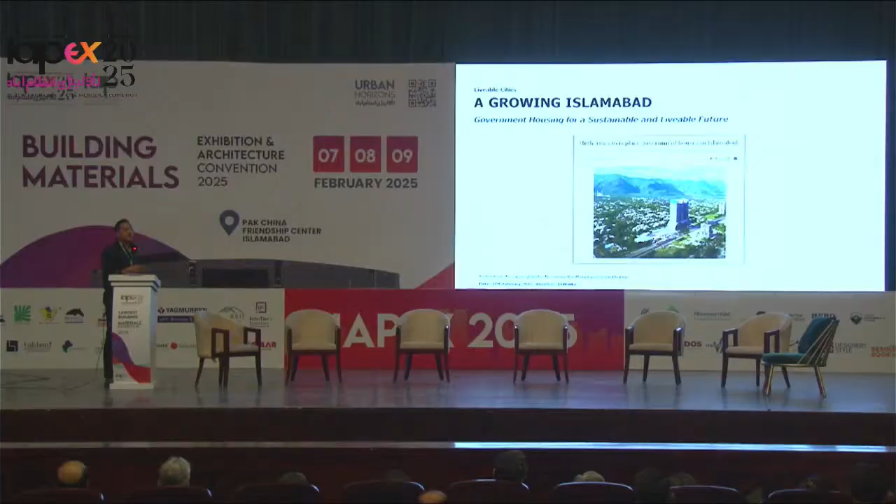Here's another project for F7. Some of her renders are not showing, sorry. Anyways, I just want to end on this last project we're introducing now, which I think is a very interesting project that all universities should be tackling - the idea of government housing being replaced. A lot of talk is now starting on this, and I think if we can bring these livable ideas and concepts into these new developments, it may present us with an opportunity to really rethink where Islamabad is going. Thank you.

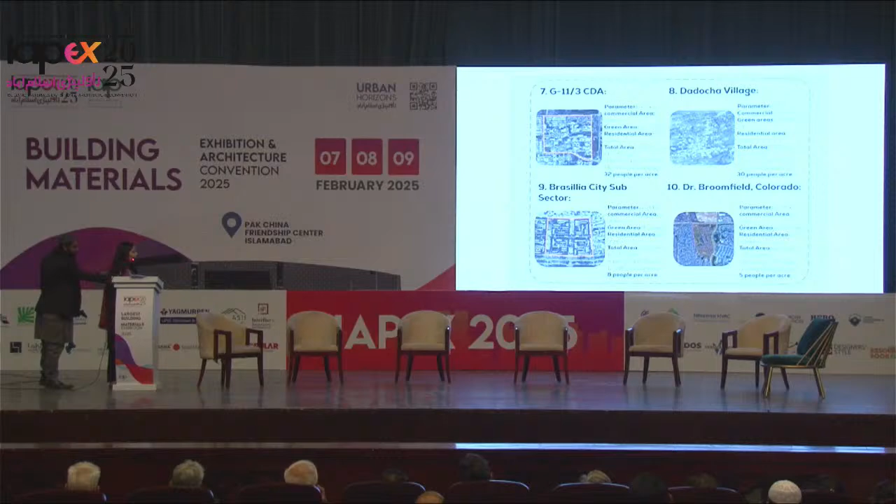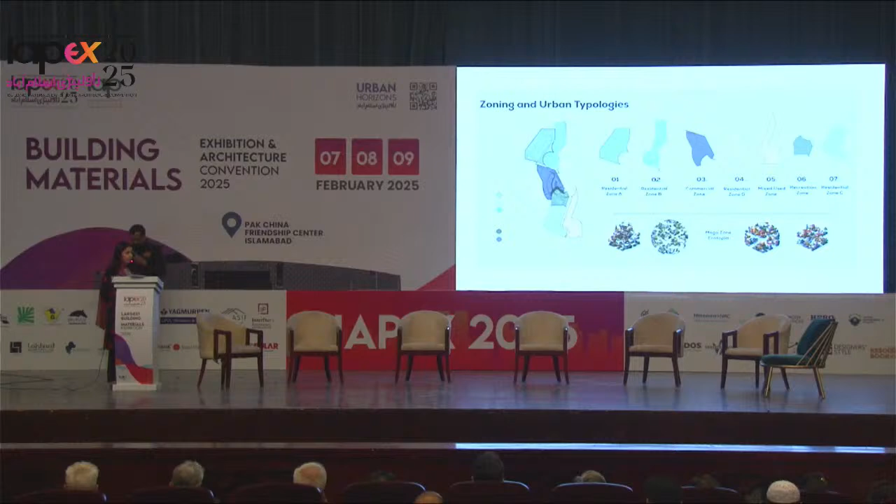So each sector was given a plant typology, and throughout the seasons what happens is the entire color palette of the sectors changes, and it provides user experiences because you're able to experience each sector in different colors throughout the seasons. So that is what happened.

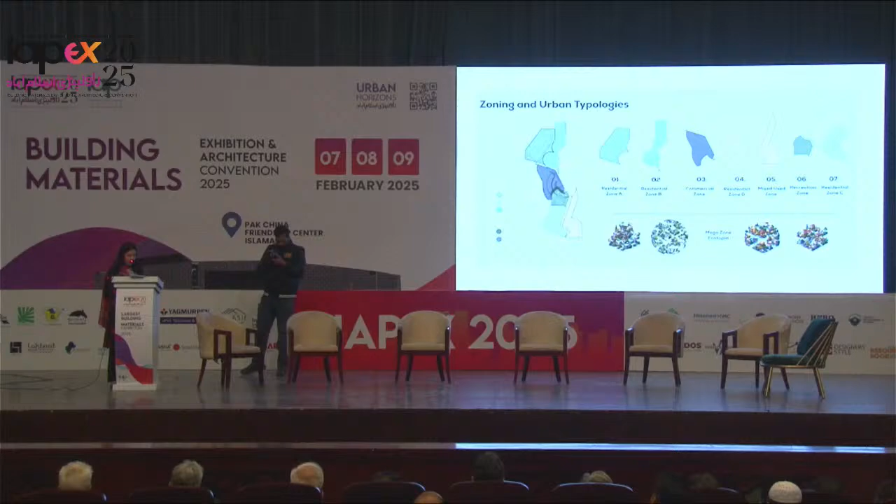Can we move to the next slide? So the plant typologies were studied that will be established here, and one of the things we're doing here is establishing farms. So the whole community is going to yield their own food here.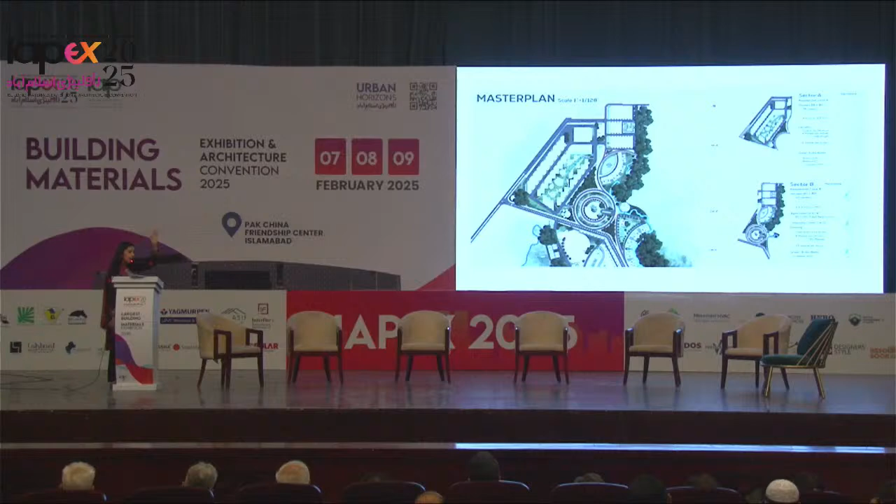The center point, the epicenter of each sector, is a communal space that has well-established landscaping, and it provides user experiences through plants, the landscaping, and natural features, water bodies as well.

The lower part comprises mid-rises and commercial areas, and what we did is we created urban swales here that will raise the water level of the surface beneath, and help retain rainwater.

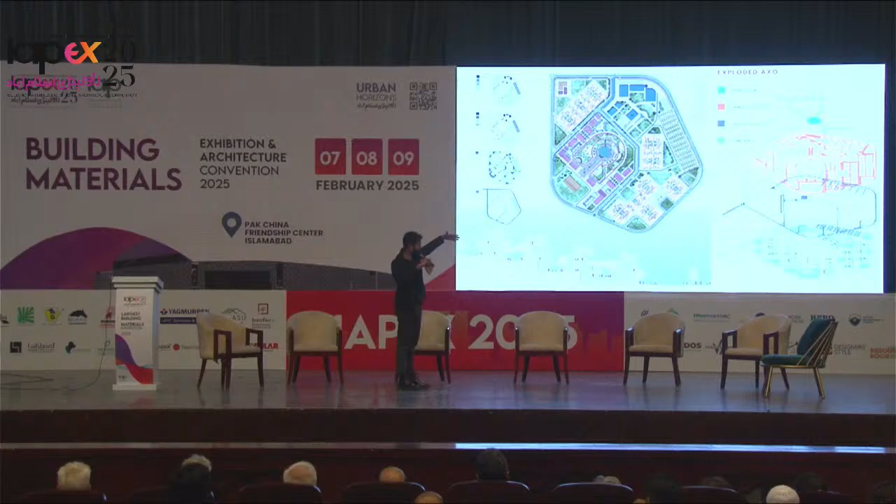अच्छा, तो इन दी एंड डेंसिटी पे बात आती है ना कि it's not working.